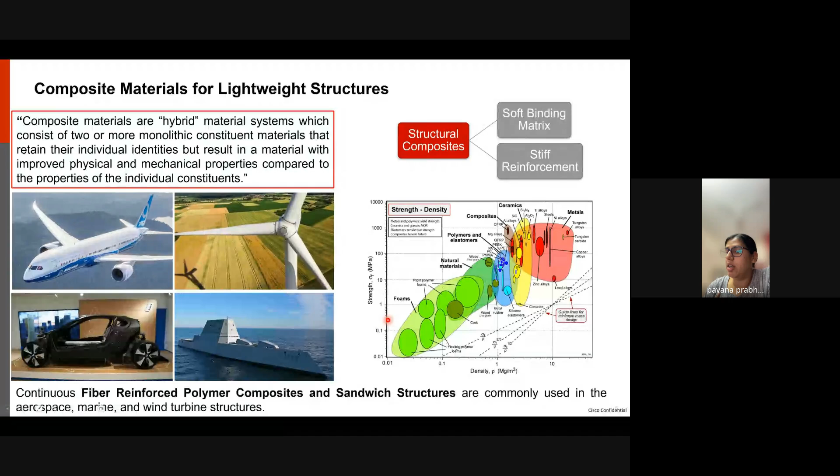Looking at this Ashby plot, which shows strength versus density, we can see that composites have strengths comparable to that of some common ceramics and metals, but their densities are orders of magnitude lower. That is a very attractive property of composite materials.

But these lightweight polymer composites are susceptible to damage and can fail catastrophically under in-service loading and other multiphysics environments. This could be dynamic impact loading, a lightning strike on a wind turbine blade, long-term exposure to moisture and low temperatures, or very high internal pressure such as in pressure vessels.

We focus on 2 main aspects of composites: damage tolerance and durability. Damage tolerance is the ability of the structure to sustain damage without catastrophic failure until a time such that the component can be replaced or repaired.

In other words, this is the load carrying capability of a structure once it has been damaged by service loads. On the other hand, durability is defined by a structure's resistance to long-term damaging effects, such as extreme temperature, UV radiation, moisture, other aggressive chemicals like salt, and stress cycles like in fatigue. Or in simple words, this is the life of a material: how long of an exposure can occur before a property dips under a certain limit.

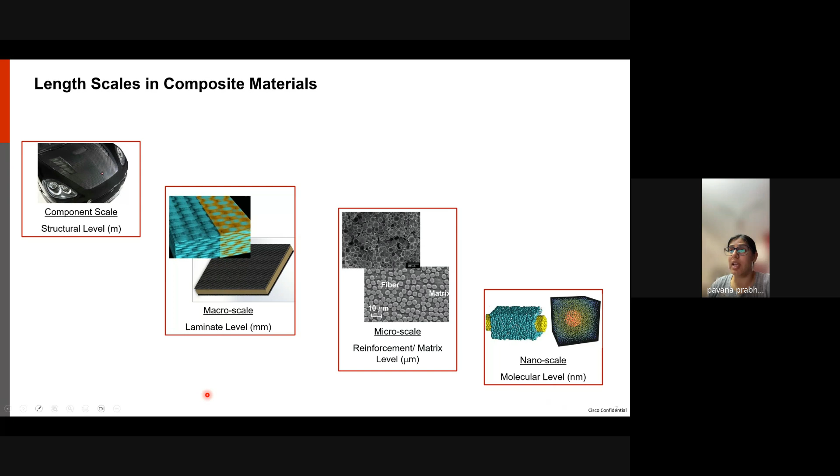So we focus on improving these 2 aspects in composite materials through architecting, which I'll talk about. But what makes it particularly challenging is the occurrence of complex failure and damage modes like delamination, intralaminar matrix cracking, fiber breakage, due to the presence of multiple base materials, multiple length scales, and how they interact with each other. But that also gives us the opportunity to tune or tailor the internal structure.

We focus primarily at the micro to millimeter scales. We're not looking at nano design of these materials. So there are two interconnected research themes in our lab in this direction.

We seek to establish process structure property relationships for manufacturing and designing, and study the damage and failure mechanics in multiphysics environments. Some of them we have looked at are listed here: extreme temperatures, dynamic impact, fatigue, moisture, and also a study we've done very fascinating on the microbial impact on their degradation.

We focus on this class of composites called architected composites, which exploit internal architecture such as hierarchical patterns and morphologies within composites, in addition to solid distribution and base material properties, to achieve some unique properties that are unattainable by traditional composites.

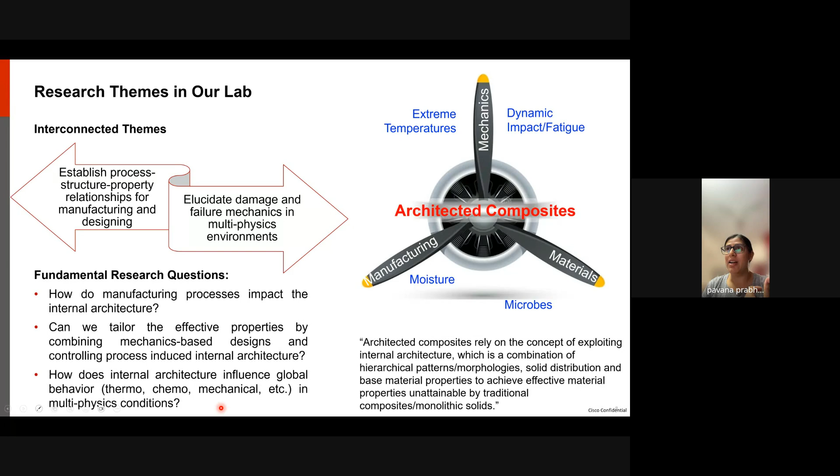A lot of this I'll talk about in today's presentation. And how does internal architecture influence global behavior, macro-scale response under thermochemical and mechanical loading, or in other words, multiphysics conditions? Although I will not focus on the multiphysics part in this presentation, we will focus on how these hierarchical designs manifest globally as macro-scale response.

So when I think about architecture, this is what comes to my mind: large structures, buildings, which have unique shapes and designs, and they're also aesthetically pleasing, but may or may not always serve functionality. And when we talk about architecture in composites, they occur at very small length scales.

At the micro to millimeter length scale, our lab has three distinct areas of research direction.

In continuous fiber reinforced laminated composites, we pioneered additively manufactured patterns at the interlaminar regions to enhance fracture properties. The second direction is sandwich composites, where we're additively manufacturing cores, designing them from micro to macro length scale for stiffer, lightweight behavior and achieving snapback behavior.

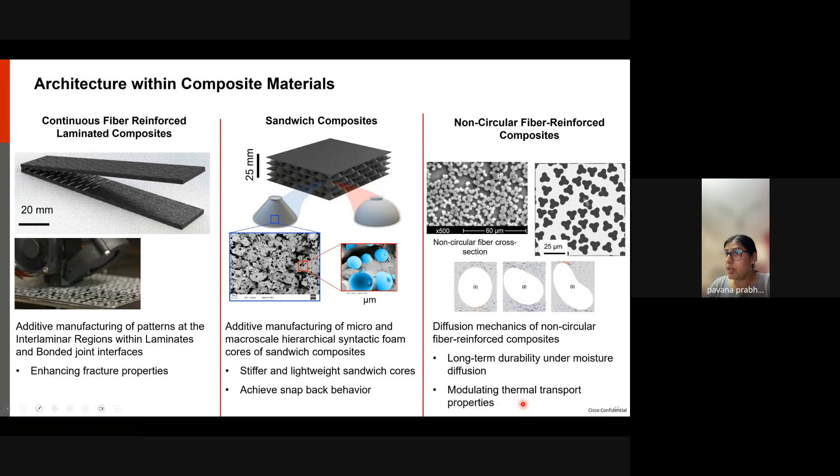The third direction looks at morphologies and patterns such as non-circular fibers within composites to achieve long-term durability under moisture diffusion, and also to modulate thermal transport properties. Today's talk will primarily focus on this particular topic.

Before I dive into that, I wanted to show what I meant by patterned interfaces using additive manufacturing. The objective is to improve the interlaminar fracture toughness and strength in stiff fiber reinforced polymer composites. The approach is to additively print patterns within traditional composites. We have 3D printing readily available, so we can impart any pattern we like at these interlaminar regions.

The other topic I talked about is composites in extreme environments like moisture and salinity. Due to melting of sea ice in the Arctic region in recent years, there's a lot of interest in how the polymer composites we currently work with will perform in these harsh environments.

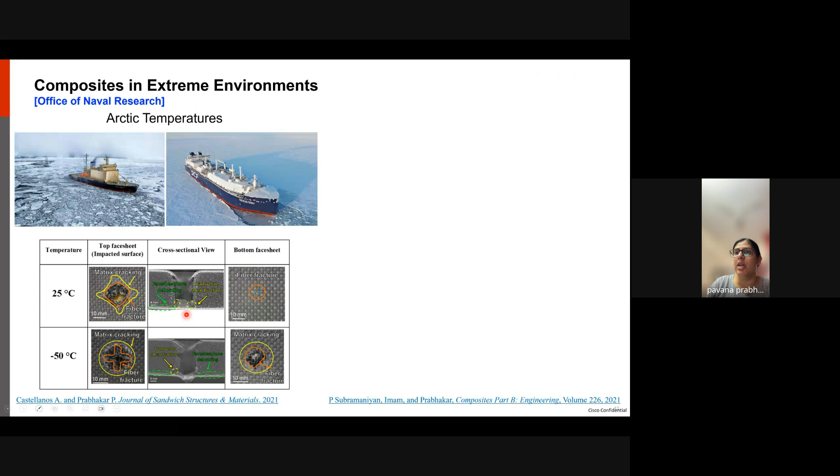Our work involved understanding how damage and failure mechanisms, primarily under impact, change under low temperature and saline environments. As you can see here, the failure mode changes from only core crushing and top face fracture to back face fracture as well, when we reduce the temperature from room temperature to -50 Celsius.

This is important to design future structures, but also to design relevant repair techniques for existing composites.

A more fundamental study focused on moisture diffusion, where we showed that non-circular fibers delay the diffusion of moisture through composites and result in reduced diffusivities. Again, more about these topics can be found in these two papers.

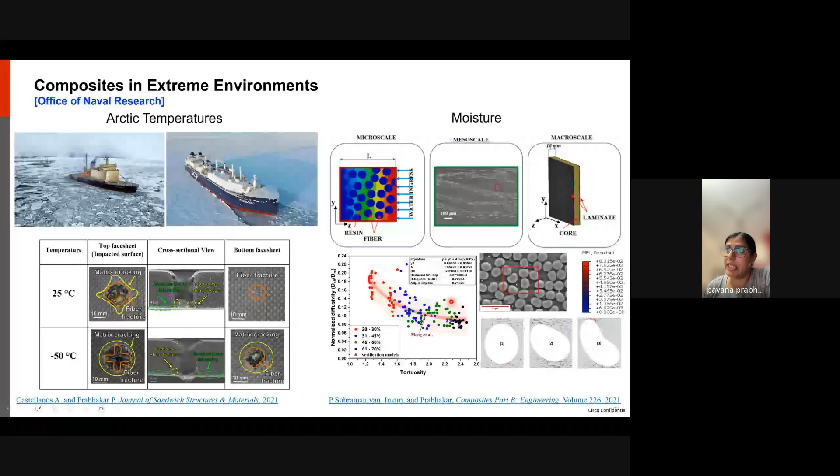The objective of this research was to design and fabricate structures that can dissipate energy and achieve shape recovery without permanent set. For example, here under impact loading with excessive deformation, there's a permanent set or damage.

We're primarily focusing on sandwich composites, which have a stiff face sheet, a lightweight core, and another stiff face sheet that sandwiches the core between them.

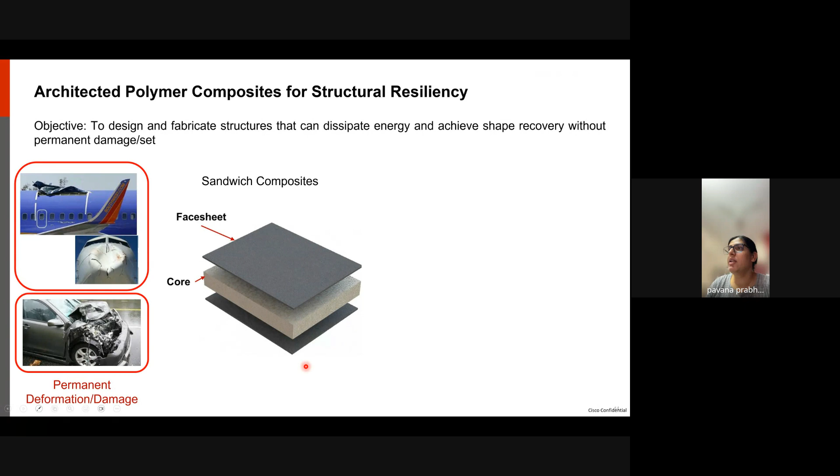This shows that these materials are currently excellent energy dissipators. They dissipate energy through core crushing, but they also suffer from permanent collapse or crushing.

So we wanted to see if there's a way we can design certain architectures in these foam cores that can achieve shape recovery after such excessive deformation, so that we do not need to replace the entire core, but just do a patchwork or so on the face sheet.

Here are our research questions. First, in the context of architected core at the millimeter length scale, can we achieve shape recovery without external stimulus after excessive deformation? We looked at concepts of negative stiffness and pseudo-bistability for that.

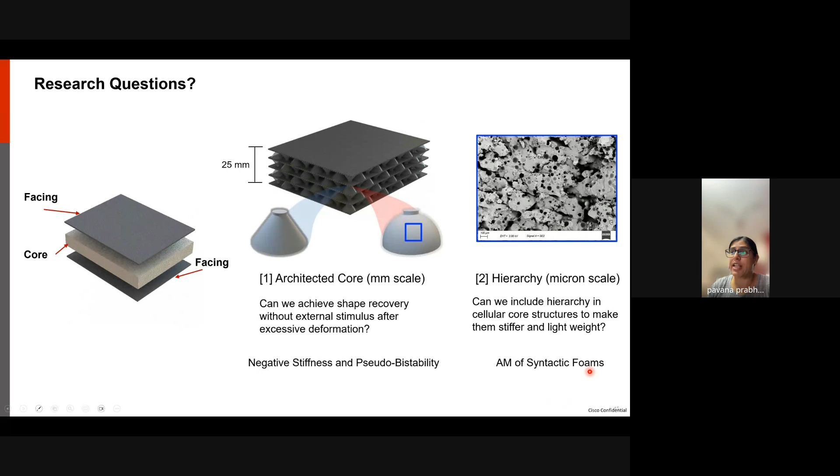Second, one length scale smaller, the walls of these architected cores can be manufactured with materials that introduce additional hierarchy into the foam core. So can we include hierarchy in cellular core structures to make them stiffer and lightweight? We looked into additive manufacturing of syntactic foams for this.

First, to design our core structures, we looked at negative stiffness and pseudo-bistability. Elastic instability can be classified into two categories: monostable and bistable.

In a monostable structure, as we start loading it, at some point it loses stability and snaps through to its second stable state, continuing in this stable state as we load the structure further. Now, at this stage, if we release the applied load, the structure snaps back to its original stable state.

In the case of a bistable structure, shown in red, after snapping into its second stable state, if we release the load, it settles in its second stable state—in simpler words, a deformed state. To bring it back to its original stable state, we need to apply more energy to the system. The displacements are shown here: it's stuck in its second stable state in the deformed state, but the monostable structure comes back to its original stable state.

Is my voice breaking? No, it's not. Okay. Other than the fact that my voice is broken, the internet is fine, right?

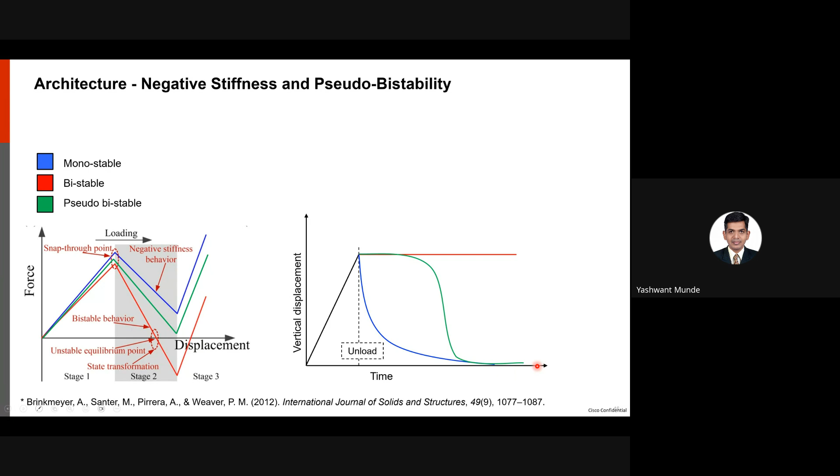So viscoelasticity that's inherent in materials aids this structural recovery. Can we exploit this property to allow recovery of the structure to its original stable state without external stimulus?

There is a work by Brinkmeyer et al. which showed snapback behavior using spherical caps made of PDMS, a highly viscoelastic material. As they load the dome, it deforms and at some point snaps to its second stable state. After a few seconds, upon unloading the load, the structure is still in its second stable state because it's a bistable structure. However, due to viscoelastic relaxation and recovery, the structure starts to move back and then suddenly pops up to its original undeformed state. This is shown by the vertical displacement versus time graph: after reaching the second stable state, the material relaxes, recovers, and then suddenly snaps back to its undeformed state.

This motivated us to try this for our hierarchical core design as well. So what architecture should we start from?

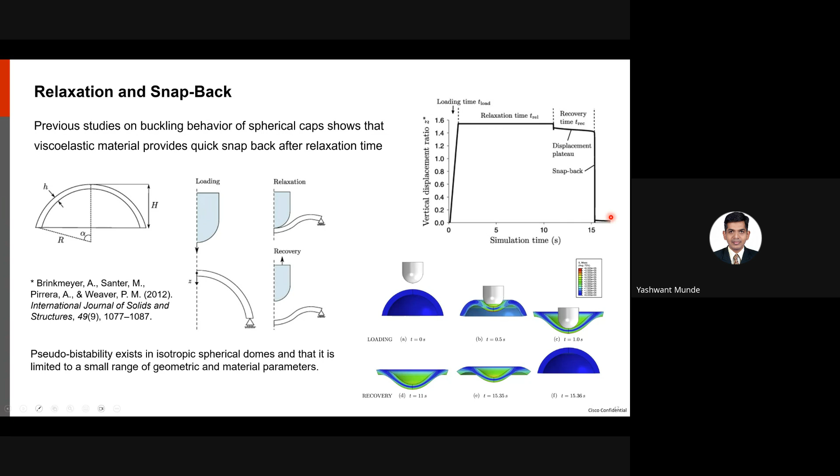That's the question. There's a lot of work out there on negative stiffness architectures—I'm only showing three of the most relevant ones, by no means a comprehensive account. This work by Lakes at UW-Madison showed that with arrays of struts arranged in this manner, there is layer-by-layer snap-through buckling from here to here to here, followed by full densification once all the layers have buckled.

A similar work by Bertoldi at Harvard showed that with inclined beams arrayed together, there is periodic snap-through buckling followed by densification, and all of these show negative stiffness zones. They also showed that compared to a vertical beam—which is monostable, deforming and returning to its original state after the load is removed—an inclined beam is bistable, meaning it buckles and settles in its second stable state.

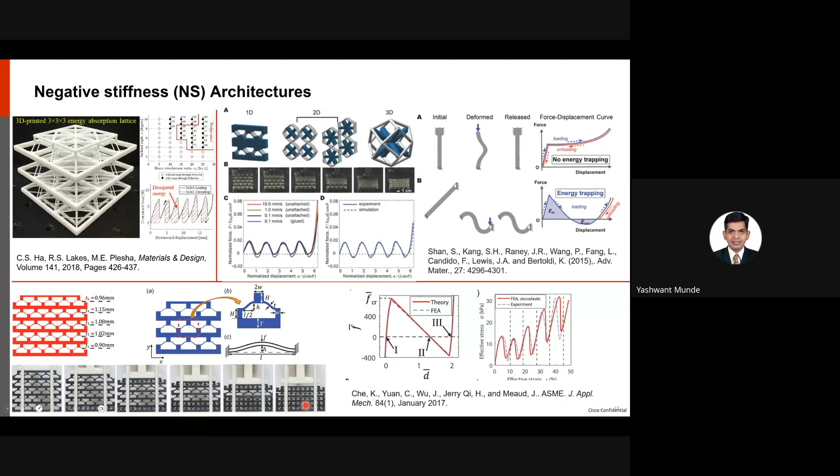Another work by Meaud at Georgia Tech, the most relevant for us, used sinusoidal inclined beams, again showing periodic snap-through buckling. They also showed that by heating it up, they were able to get the structure back to its original stable state.

With this in mind, we wanted to extend this design to a 3D structure, especially for foam cores. We started with a baseline sinusoidal shape, and using convolution in 2D, extended this to a 3D structure very similar to an egg crate that you might have seen. The unit cell is as shown here—quite complex to start with and parameterize.

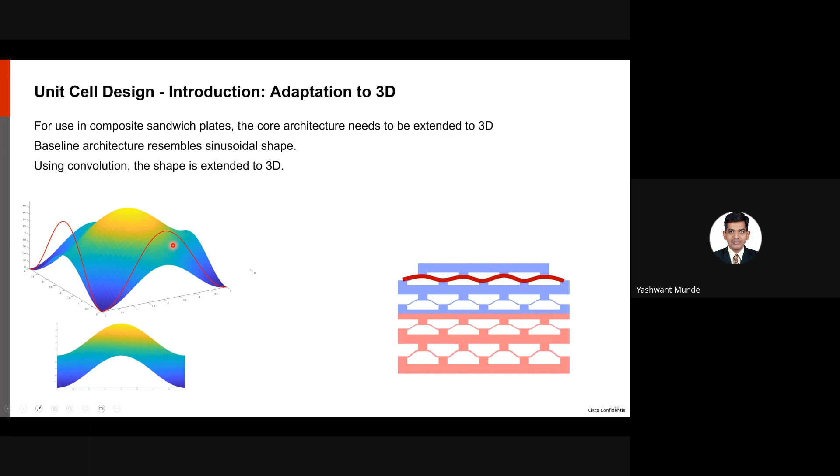So we looked at two extreme designs: a truncated cone and a dome structure. An initial study showed that, as expected, for the same wall thickness the cone has a higher initial slope in its low displacement response compared to the dome. Because we want adequate stiffness in our core structures—since we are looking at these as potential sandwich structures—we chose the truncated cone as our unit cell.

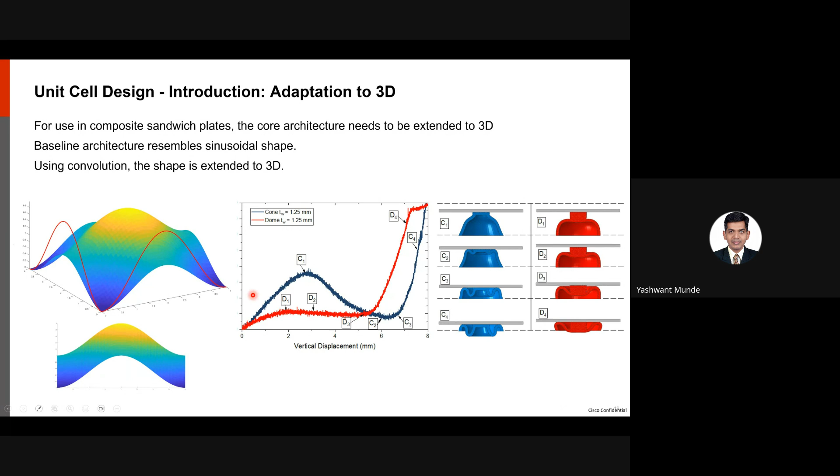We manufactured this using stereolithography, a 3D printing technique where we start with a resin and shine light layer by layer, as shown here, to create a 3D structure. We used a thermoplastic elastomer because we wanted sufficient viscoelasticity in the material.

So we created these truncated cone structures and arranged them as shown here. This is just one layer of these truncated cones sandwiched between stiff facings. We can create multiple layers by 3D printing them accordingly.

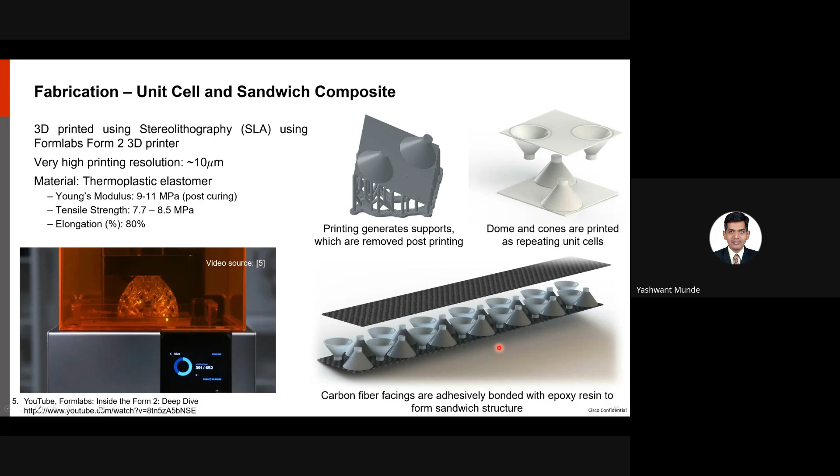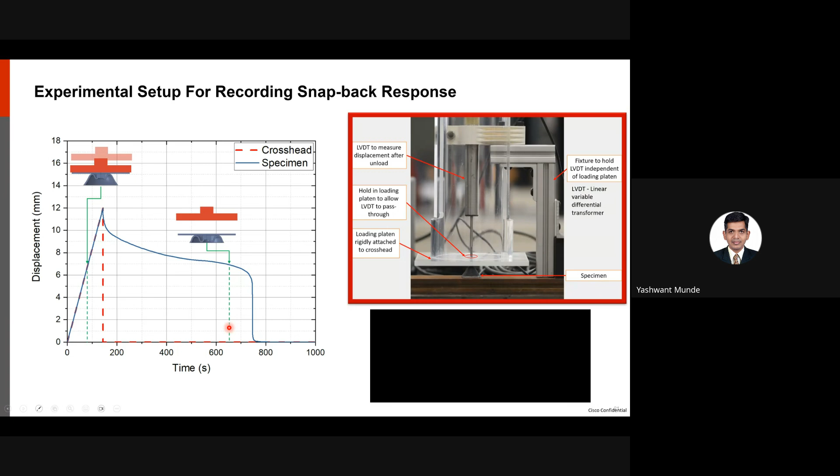We non-dimensionalized these geometric parameters into three: alpha, beta, and gamma. Alpha represents the thickness of the unit cell walls, T by L. Beta represents the slope that the walls make, H by RB minus RS. And gamma represents the curvature of these unit cells.

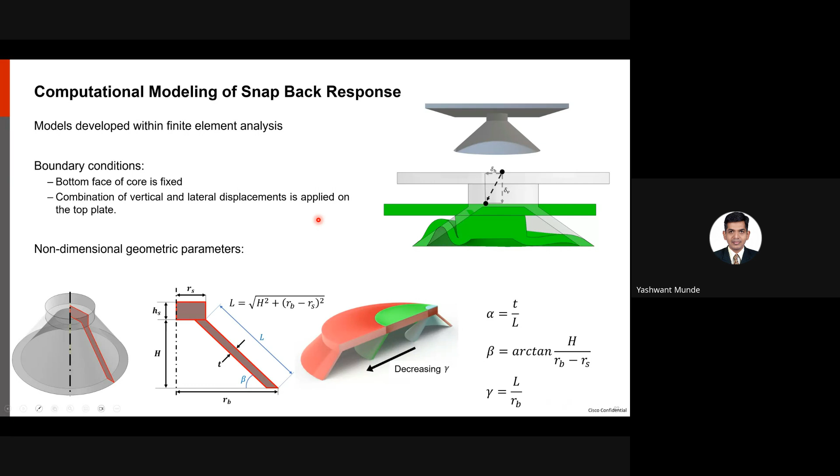So we modeled and simulated this in Abaqus. The inputs to this were the viscoelastic response of the material. We used a hyperelastic Mooney-Rivlin model with viscoelastic properties as a Prony series, as shown here. These inputs were obtained by performing relaxation tests—tension, hold the specimen, and allow it to relax—and we fitted that with the Prony series. Here's a response showing that these Prony series parameters do a good job of capturing that viscoelastic relaxation.

Using these parameters, here's an example of how the structure deforms when loading it, and then the material has some relaxation, followed by—as you can see—it immediately snaps back at that stage. So this is the response we are expecting when we have a good combination of geometric parameters and viscoelastic properties.

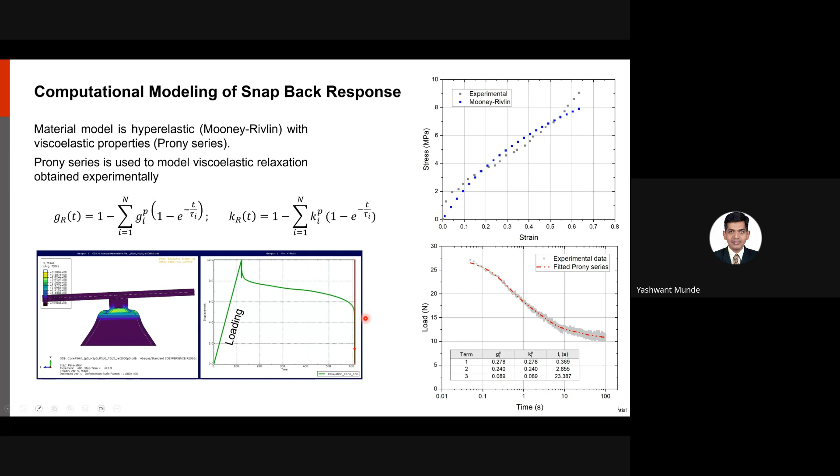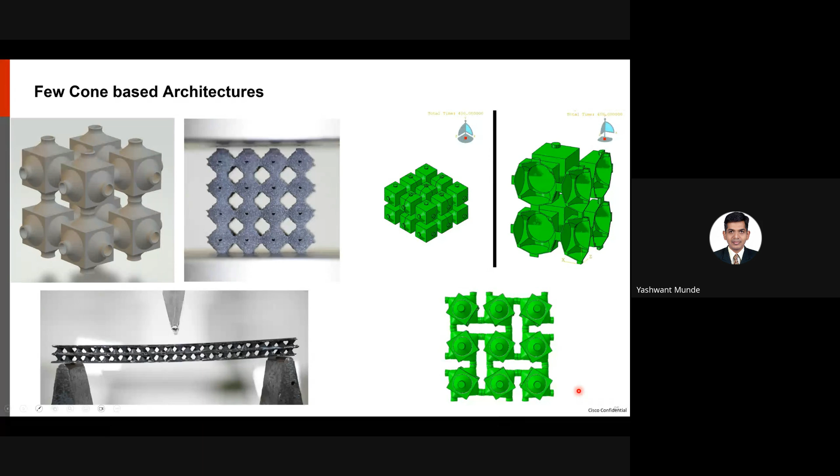We can also use this for reconfigurable structures. As you can see here, they can be compressed into a compact structure and released where needed.

So this comes to the end of the first part of this talk. That is, we proposed an alternate sandwich core design using viscoelastic architected structures. The viscoelastic relaxation of the material introduces an intermediate state of stability between monostable and bistable in the form of a time-delayed recovery, otherwise known as pseudo-bistability. Due to this pseudo-bistability, structures are designed to buckle and collapse to dissipate energy and recover on their own after a certain period of time, exhibiting structural resilience.

Design maps constructed by computational modeling showed that a small range of geometrical parameters result in bistable or pseudo-bistable behavior, and imperfection reduces it further. Some future work is to explore other design possibilities for sandwich cores, and also how to make these stiffer and lightweight. As you saw, these structures were quite flexible, so not ideal as a core for a sandwich structure. So how can we make them stiffer while keeping them lightweight?

That creates a nice segue for the second part of my presentation, which is on additive manufacturing of syntactic foam composites.

I can pause for a second if you have any questions, or we can keep it for the end, however you'd like. Should I continue? Yeah, please. Yes. Okay, sure.

Now, the objective here is to enable additive manufacturing or 3D printing of architected syntactic foams for these sandwich cores. Here's the idea. We touched upon this part, which is architecting at the millimeter length scales. Now we want to introduce an additional level of hierarchy by creating segregated matrix regions in these walls of the unit cells with embedded particles within them.

The material, in this case a thermoplastic polyurethane, TPU, inherently is a composite at the nanoscale, where they have hard domains which are arranged into hard structures as shown here, which are hydrogen bonded, and surrounded by more flexible chains of polyols as shown here. Now in our work, as I said earlier, we are not manipulating these aspects. We are fixing the hard domains in our structure, in our material, but more so tailoring the internal architecture at the micron length scale.

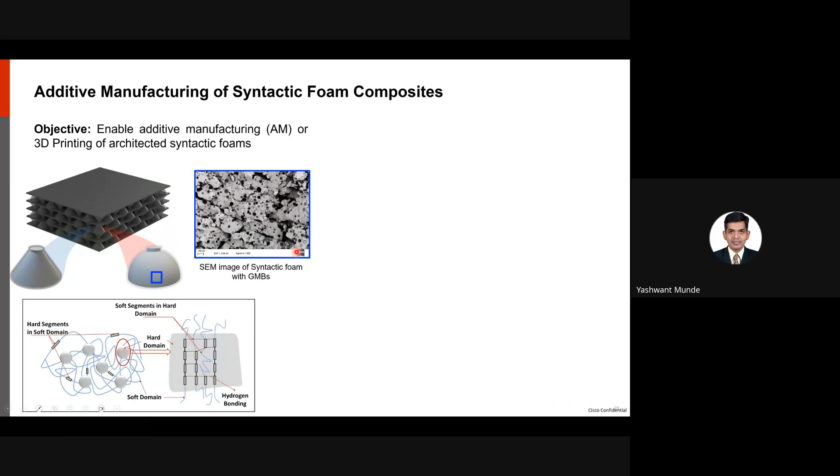So in this work, we are printing these cell walls with polymeric syntactic foams. We chose selective laser sintering to manufacture these hierarchical syntactic foams. I'll tell you in a bit why.

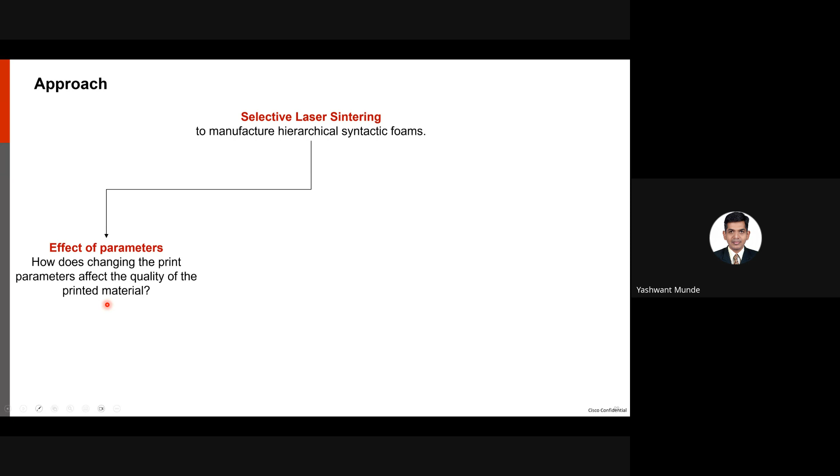So we're looking at the effect of parameters. That is, how does changing the print parameters affect the quality of the printed material? Second, how does changing the volume fraction and the size of microballoons influence the morphology and the mechanical performance of the foam? And last, how do printing these hierarchical foams with architectures - what are some differences between the architected foams printed with pure elastomer compared to those with the microballoons embedded in the cell walls? So in the next few minutes, I will try to answer these three questions for additive manufacturing of syntactic foams.

We go from 60 micrometer mean particle size to 22 to 15. The syntactic foam that we print uses this nomenclature: SF stands for syntactic foam. The first number is the particle size, that's 60, 22, or 15. Dash VF is the volume fraction of these particles we're adding to the TPU powder.

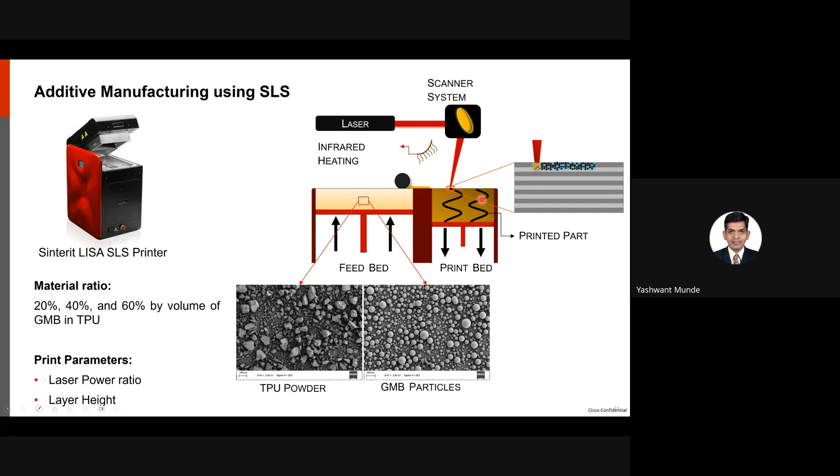Okay, so we started with just pure TPU first and tried to understand the effect of these print parameters. Here we looked at something called LPR, the laser power ratio. 1 implies a laser power of 3 watts, and 1.5 and 2 are just multiples of that value.

This is the limit of the SLS printer we used, but it was to our advantage because it gave us some unique internal architectures, such as segregated regions when we used these low laser power ratios. Our default layer height is 0.12 millimeter, and we could go to 0.075 millimeter and 0.15 millimeter as the two layer heights.

So first we looked at the tensile performance. As we increased the laser power, we saw that the strength and modulus increased. And with increase in laser power, and decrease in layer height as well, we saw that the tensile properties increased.

For example, the star here is laser power ratio of 1.5, but with reduced layer height. So we see there is a slight increase in properties when we reduce the layer height as well. So we chose 1.5 and 0.075 as our parameters to print the consequent structures.

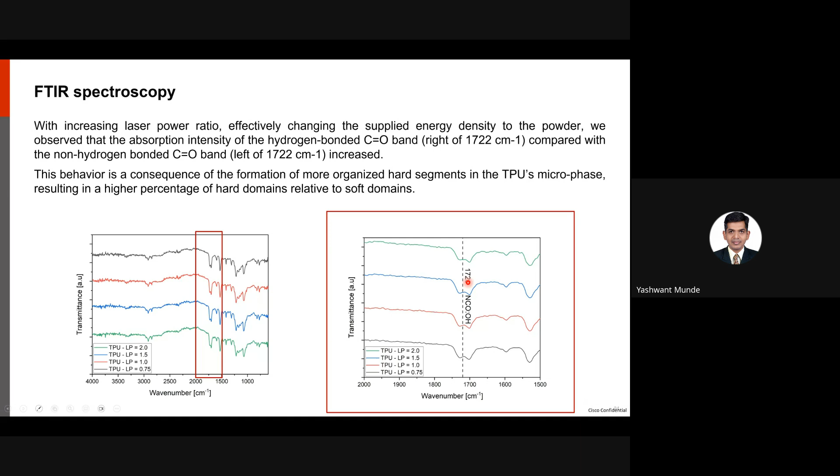So we showed this for the first time, that GMB particles dictate the cell wall size, and this is attributed to higher scatter of the supplied laser energy due to higher particle density per area in the powder blends, with the highest scatter occurring in the smallest GMB particle case.

So we wanted to see how these manifest as mechanical properties, first in tension. As expected, as we increase the volume fraction for a fixed particle size, the strength dropped and the moduli stayed in the same region as shown here.

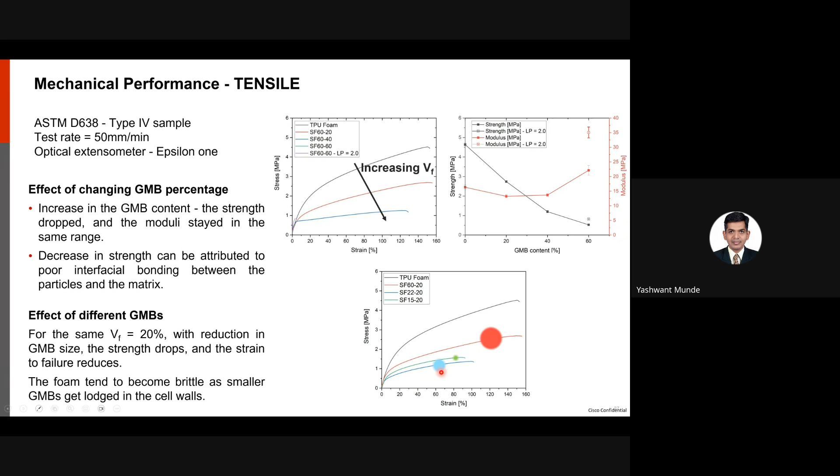But our main focus was in compression because of these high pressure conditions in underwater vehicles and things like that. So we wanted to understand what is the performance under compression.

This can be attributed to lower crushing strength of the GMB particles. As you may recall, the larger particles have the lowest crushing strength, and they also create bridges between the cell walls, causing their compression and collapse, resulting in this reduction of the plateau region.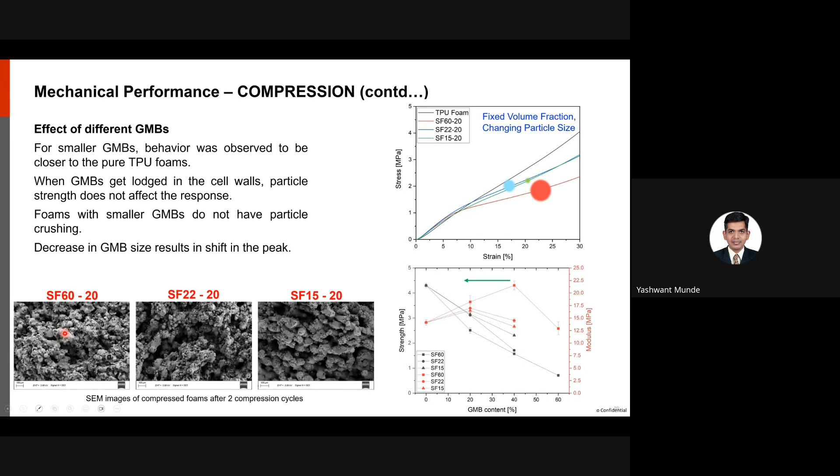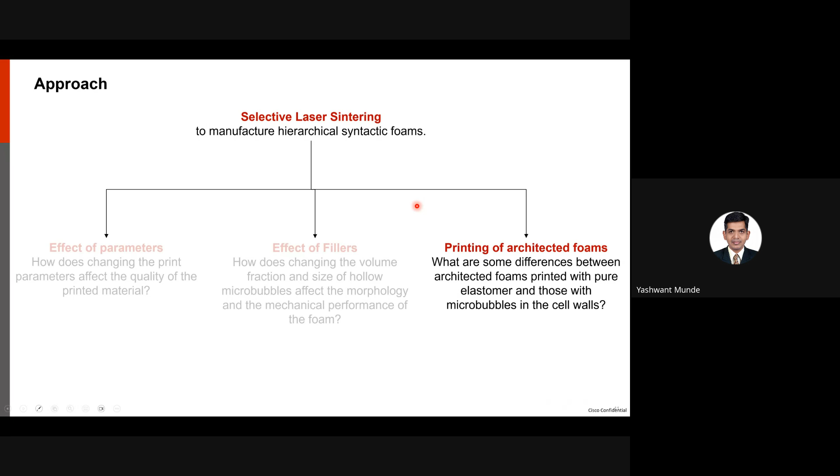So the last topic is how this difference in stiffness and densification manifests in the architected cores. Here we consider two types of architected foams.

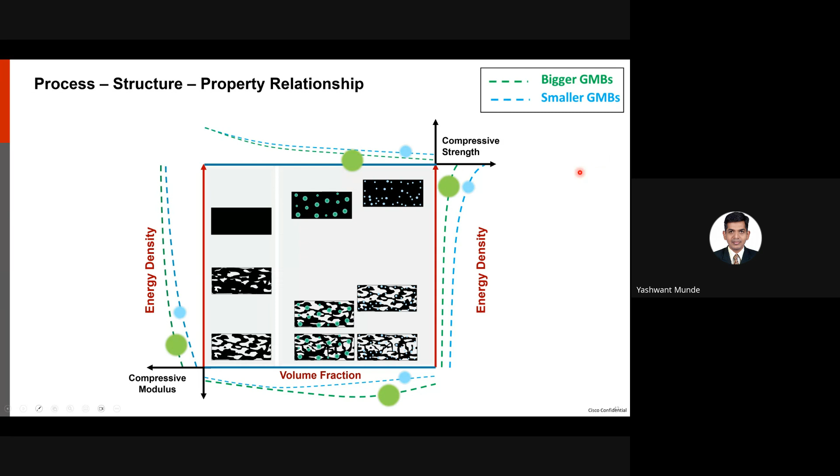In terms of compressive strength, we see that as the energy density increases, the compressive strength increases because of better contact and confinement of the particles, and the smaller particles show a higher improvement in compressive strength. In both cases, the strength decreases with increase in volume fraction, so we want to limit that to a smaller volume fraction.

Here we see some polyurethane rigid foams, PVC cross-linked foams, and our foams at this stage. There are also some epoxy-based, very stiff foams, so we will not compare them here. Right now we have the strength slightly lower, but in a reasonable density range.

But with architecting, and by increasing the inherent hard to soft segment ratio, which we did not change in this case, we can push this up in terms of modulus. Then architecting them, which would create some hollow regions, would reduce this density but also reduce the compressive modulus a little bit. So this is what we are striving for going forward—manipulating the hard to soft segment ratio in the viscoelastic material we are looking at, and further architecting.

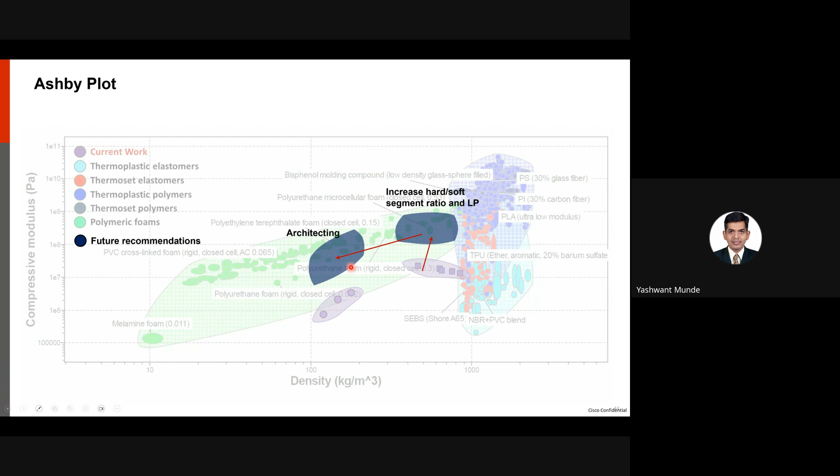So in summary, we shed light on the mechanics of additively manufactured syntactic foams with segregated matrix. We showed how AM parameters can be coupled with GMB parameters to achieve desired mechanical response, or tune the mechanical response with such segregated matrix.

We demonstrated for the first time that when we have such segregated regions, the microballoon size dictates the cell wall thickness, and also decides whether we have a stiffer response or a high densification stress in these syntactic foams. The influence of microarchitecture on the macro-architected syntactic foam, that is, how embedding these micro scale particles manifest differently when we choose stretching dominated versus bending dominated architectures under compression.

Some ongoing and future work: we are looking at the impact response of these architected polymer composites. We've done a fair bit of work in the thermal, dielectric, and viscoelastic response measurement of these syntactic foams. There's a published paper and an arXiv paper if you're interested to read further, primarily in view of marine and oil and gas industries, where we can use these perhaps for underwater cables and pipelines due to their excellent insulation properties.

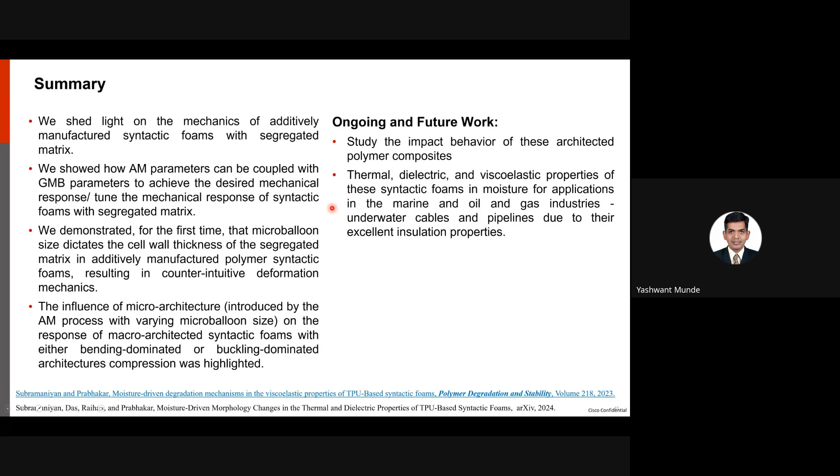Some potential applications of these flexible syntactic foams: when we're looking at morphing wings or blades, these provide a very good lightweight alternative to tune how the blades and wings can be made flexible, extending the chord or changing the shape of these wings and blades in either an active or a passive way, because they require very little or no energy to switch between different modes during shape change.

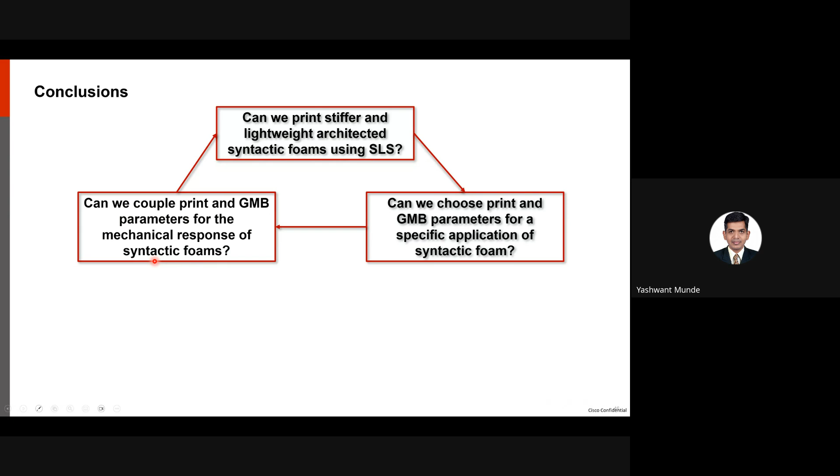So with that, I'd like to conclude saying: Can we print stiffer and lightweight architected syntactic foams using SLS? Yes. Can we choose print and GMB parameters for a specific application? Yes. And can we couple print and GMB parameters to tune the mechanical response of syntactic foams? Yes. So we have answered all three questions in this work. So with that, thank you all for listening.

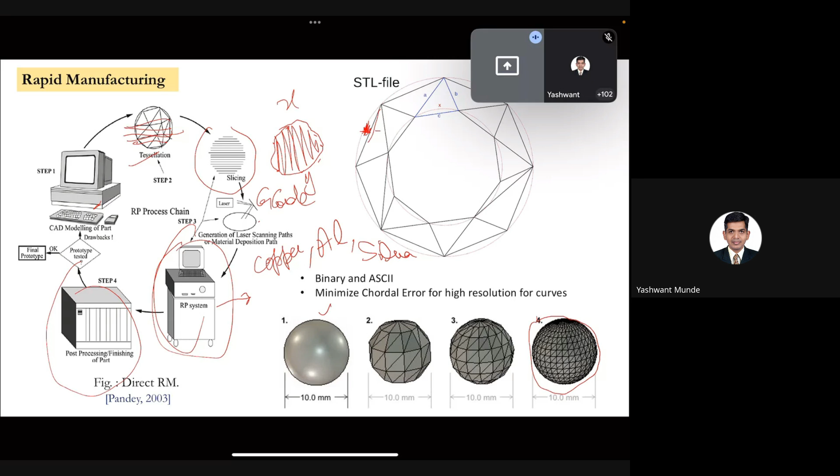But as I gave the example, you have to make something like copper, which is very difficult to fabricate by this process. For example, aluminium is very difficult to fabricate, and you have to fabricate silver. It's not possible to make silver products using this RP or any traditional RP system method.

So you have to go through different indirect methods. I can give you a couple of examples of indirect methods. Like already we are using an indirect method in investment casting. What we do for casting, we need a pattern, and that pattern is fabricated by a polymer 3D printer.

So you have a polymer 3D printed part. It can be FDM, SLS, SLA, or any type of process. Later you use it to make a mold. You fill it with investment material, then remove it. You get some space, and you pour some melted liquid to get the final shape.

That is the traditional process of investment casting. This also comes under indirect rapid manufacturing. You've made the final part, but it is not directly 3D printed - it's indirect. You use 3D printing as a component, and you use another process like casting to make the final metal product.

You can use aluminum casting, steel casting, any type of material available for casting can be used in this process. But there are many limitations - when you're casting, you don't have good mechanical properties, you have to do thermal treatments. So that is also a problem in this process, but it is handy to make any shape.

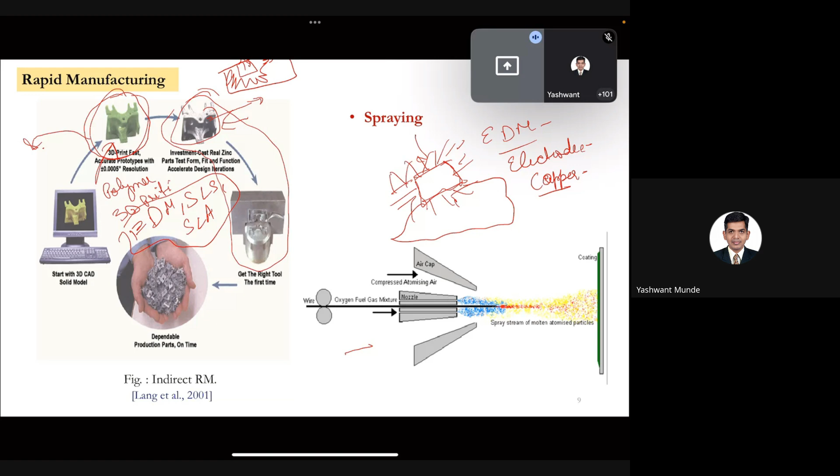So another process is electroforming, and another process is investment casting, which I shared earlier.

Another process is sintering. Instead of using casting, if you use sintering, it always has an advantage as compared to casting. It does not have residual stresses, and it has good mechanical properties as compared to casting components.

In sintering, you don't need melted liquid. You just have to go up to 60 to 80% of the melting point, you don't have to go large. Like if you have to sinter a ceramic which has a 3000 degree Celsius melting point, you can easily sinter it at around 1800 to 1900 degrees Celsius. That is the advantage of sintering.

So we will see how we can use a polymer 3D printed part combined with sintering to make metal parts.

Now you don't have a laser, there is no laser, there is no electron beam source. So joining of the metals is by conventional induction heating, or whatever the heating source is in the furnace. It can be a microwave furnace also, but you don't have a laser, which tends to reflect when it falls on a highly thermal conductive material like copper. So by combining the polymer 3D printed part and sintering, we can easily make copper 3D printed parts.

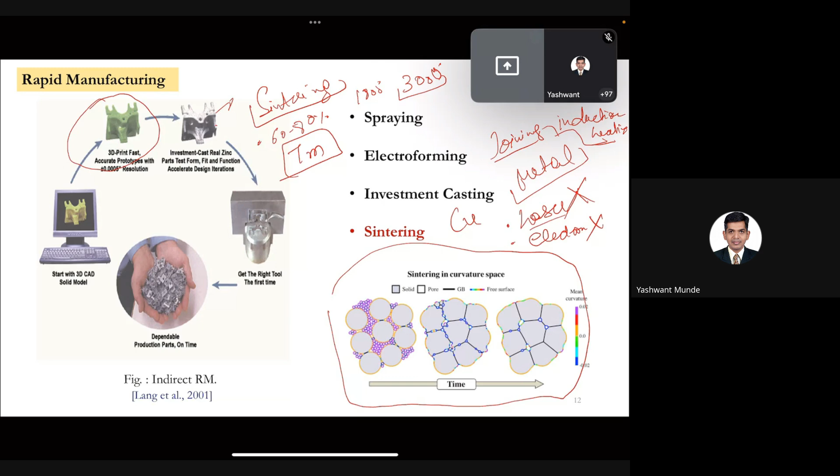Let me show you some. So to understand sintering, we need to understand the mechanism first, how sintering works.

Sintering generally works when you have metal particles that are very close together, not joined, but packed at the boundaries. When you heat up to near 60 to 80% of their melting point, the atoms in the metal particles get activated, and they want to lose energy, so they start making a neck among the nearby particles. There could be small dislocations which give a chance for releasing energy and transferring atoms, making very small joints that turn into small necks, and these necks grow and form a full component.

This is called the first stage of sintering, this is the second stage, and finally when there are very small round pores, that is the third stage of sintering. So in sintering, it's very difficult to get a 100% dense part. You can go maximum up to 99.99%.

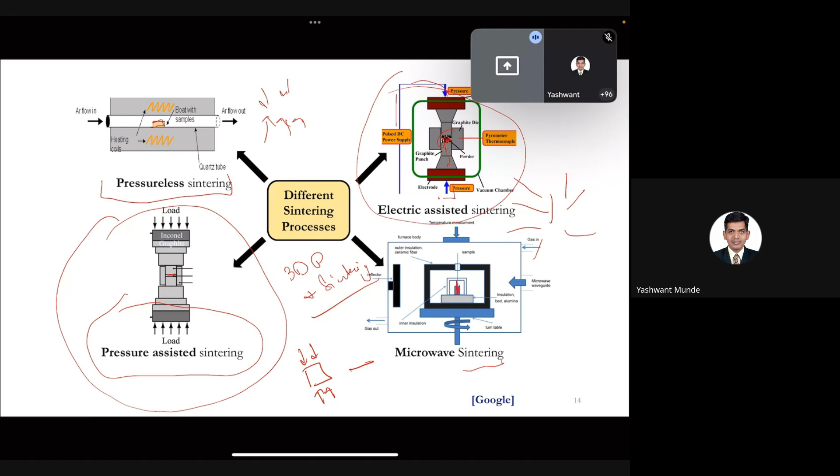When you are having a complex shape, like a porous structure that is hollow from inside, you can't put load on it, otherwise it will destroy the sample. So pressureless sintering, or microwave pressureless sintering, where there is no pressure on the sample, is the best suitable process to use with 3D printing.

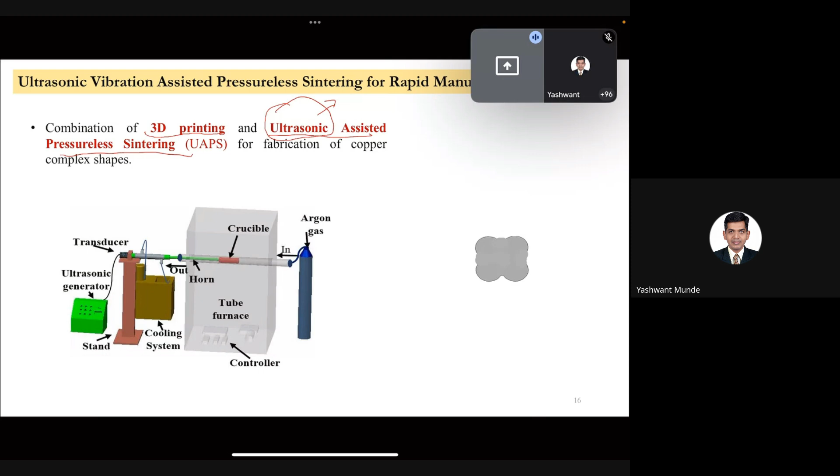So we have developed a new and unique process, very cost effective. Just within 2-3 lakhs you can make this setup. This process combines 3D printing with ultrasonic assisted pressureless sintering. Now there's a new word here, ultrasonic. I will explain why we need ultrasonic, and once you relate it with the mechanism of sintering, you will understand the requirement.

So the process works like this. First you need a CAD model. You can come up with any shape. This is a very complex foam structure with varying graded strut size, like 1.2mm to 1mm or 0.8mm at the end. So it's a graded structure, and you can make any CAD model.

After the CAD model, we will print it with any polymer 3D printing machine. It can be FDM or SLA. In this case, I have used SLA because it gives me a very fine surface finish. That's why I'm using SLA here.

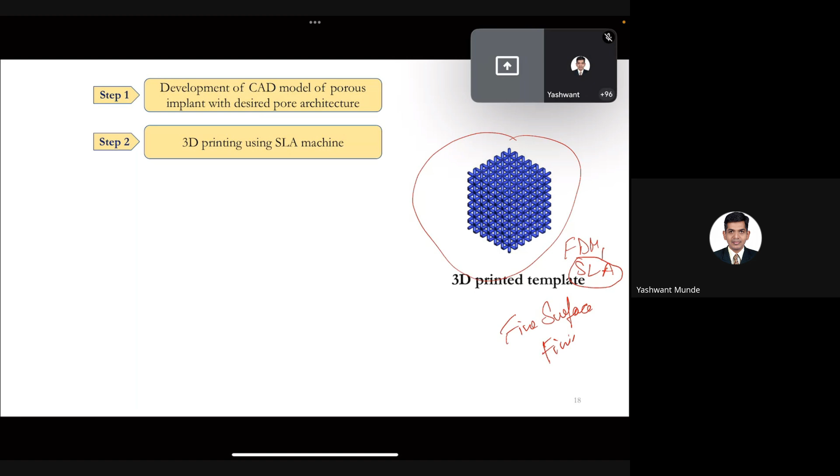Then the third step is to make a mold. You take your 3D printed sample, put it in a crucible, and add investment powder. You can use POP with water, or any dental wax investment powder, mixed with some solvent. When you mix it, it hardens and you get a very hard structure. Now in the pores, you have investment powder.

The fourth step is I put this whole crucible in a simple open furnace, which costs around 40,000. I heat it up, and what happens is your polymer, which is blue color, burns out and you get empty spaces. Now this empty space, I will fill with copper powder.

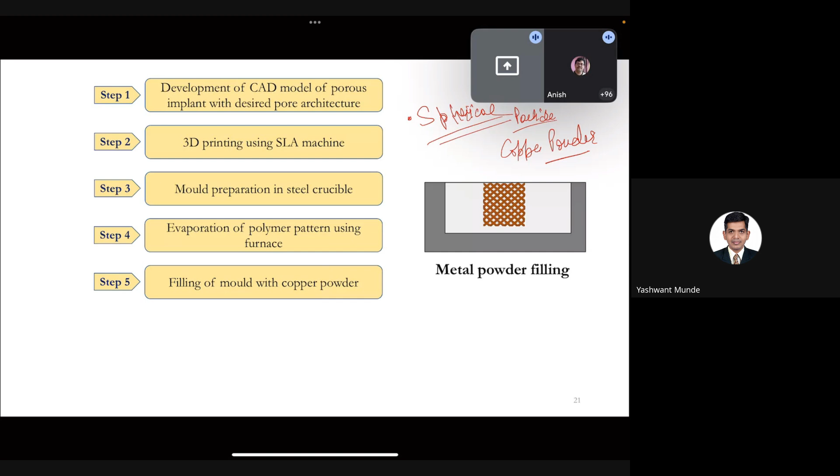Now here's a condition: your copper powder should be spherical in nature. If anyone wants to answer why we need spherical particles, I would be really happy to hear that. Why can't we have an irregular shape for sintering? Anyone want to answer this? Dear participants, anyone can answer - why is spherical particles required for sintering?

It's required for good densification. You can relate it with surface energy also - you're having a better surface area and a better connection. You can have better channels to transfer energy from one atom to another. That's why we need spherical powder. I am filling it here because I can't put a load, so I don't have space to put load. These are free particles, so I need a free, spherical particle.

So now if I sinter a spherical particle, at the end it will give me a pore in the center. But then my sample will only be 70% sintered. I need my density around 99%. To get 99%, I need to put load here, so that they can squeeze together during sintering.

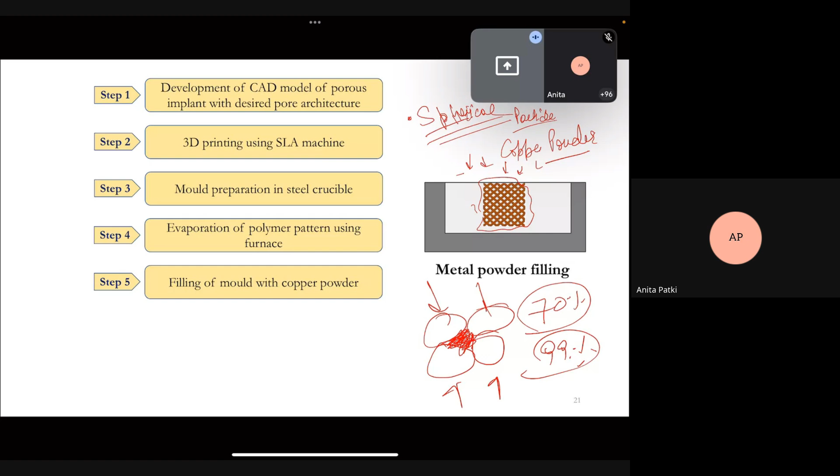So it means my sample can't extend further - I can't extend my sintering process. It has already reached nearby 99%, or 98.5% which I get here. So I need some external energy which I can give to the sintering particles at high temperature, so they can bond together better, and diffusion could be better. I can't put a load, but I can give another external energy.

So in this case, we have given ultrasonic vibrations. We tried to give vibration to this crucible so that vibration can reach my particles and they can bombard with each other.

They can bombard with each other and create local energy, local temperature at very local joint points, and this can increase the densification.

So we have designed this whole setup, which was only around 1.5 lakhs. It's a simple setup, not a complex one.

It has just an ultrasonic generator and an ultrasonic horn, the big horn. That was a new thing we did. We designed a new ultrasonic horn which we take up to 1000 degrees Celsius, attached to this crucible when placed in the furnace.

So this is the whole process, starting from the CAD model, and at the end, when you sinter it with ultrasonic assistance, you get a dense structure having the same shape as the CAD model. These are some examples, very complex shapes and forms we did, giving very pure copper, around 99.9% pure, which is very difficult to get with a laser-based system.

So you can use it even for gold. Gold is also very difficult to make by a laser-based system.

So the major designing component is the ultrasonic horn. I will not go in detail, those who know about modal analysis can easily pick it up. Generally when designing an ultrasonic horn for ultrasonic machining, we use a one nodal method, having one node and two anti-nodes.

This is generally for the step horn, around 128 point something mm in length by analytical calculation. But in this case, we need a very large horn, so we combine these small horns into having 6 nodal points.

And having a number of anti-node points, so that when we start giving vibration at a certain amplitude, it should amplify at the middle, and the same amplification should continue to the end. So this is our manufactured horn, which we verified with the vibrometer to check the vibration.

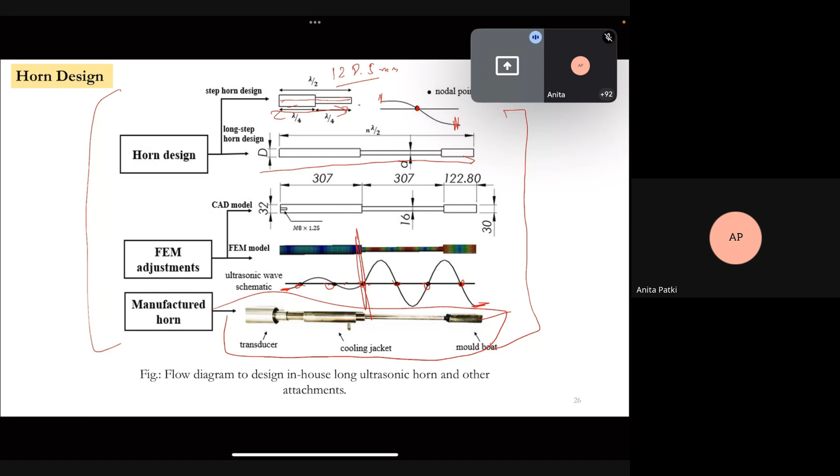Is it giving the same natural frequency, or the same amplitude value? We required around 20 micron meter displacement in the longitudinal direction.

So we have to do FEM modeling, regarding modal analysis, and check how much vibration is passing in the longitudinal direction.

So what is the physics behind it? That is important to understand. When I'm having spherical particles and I give vibration, I have to move it in a particular direction. What will happen? There will be rarefaction and compression among the particles.

So we have chosen random shapes and random sizes of particles. The shape was spherical, but they were random sizes.

What was happening when we gave vibration at room temperature without putting any pressure? All these small particles tried to settle in the voids of larger particles. By this, we have already increased the connection.

This connection is generally achieved in the conventional process by pressing them to make a compact, but here we can't put pressure. So we did it by ultrasonic vibration so that we can increase their connection.

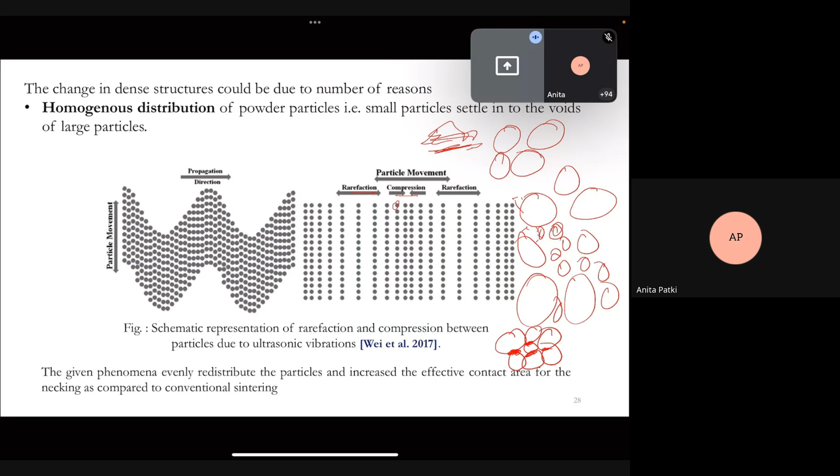Second, as I mentioned, when we give vibration there should be local heating between the particles. We tested this and found around a 30 degrees Celsius increase in room temperature, from around 30 degrees Celsius going up to 60 degrees Celsius when putting vibration to these particles. And as we use it along with sintering, the gap will be higher.

Basically the densification at 950 degrees Celsius for the copper is around 99% as per the conventional sintering, but at 850 degrees Celsius we got around 98%.

The reason for getting this at low temperature is you are having local heating among the particles. This is generally called flash heating. We verified it with the mathematical model also.

What is happening when you are having a flash heat? The particles, when they are bombarding, are trying to create dislocations, which we see by TEM also. There are very small dislocations. Dislocations are defects, so it can be any screw dislocation or edge dislocation.

Through this dislocation, when you have a chance of activating the atoms, the atoms release their energy to make bonds with other free atoms, in terms of defect dislocation. By having flash heating, you get more dislocations and better densification. Your material flow stress decreases when you are flowing the material from one particle to other particles. That is the physics and fundamental behind this process.

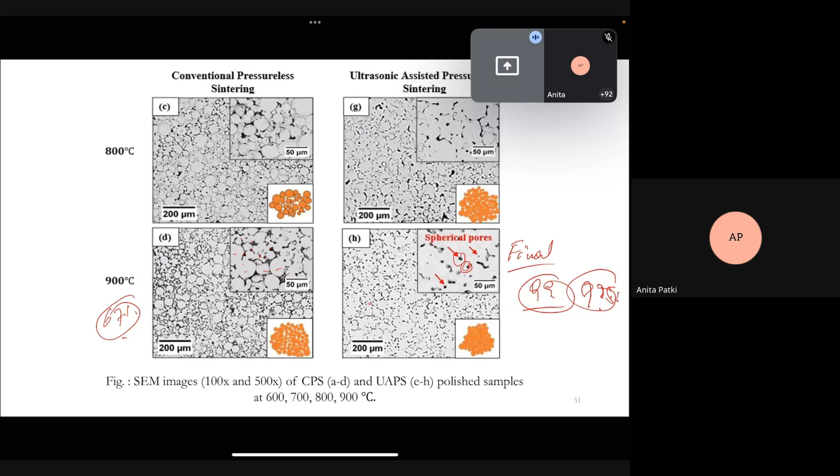After developing this process, there are many concerns, like can we make it better? In the previous slide we added ultrasonic vibration. There are other factors in sintering like sintering temperature, heating rate, soaking time. A number of things could be optimized to get better densified parameters.

But in 3D printing, when you are comparing with the CAD model, our major requirement is always the shape. We should get the same shape as our CAD model.

For this, we need to optimize the shrinkage, whatever shrinkage occurs in the X direction, Y direction, Z direction. We need to avoid the shrinkage and have a minimum shrinkage so that we should stay close to the CAD model always.

We can do some compensation. So we approached response surface methodology, found out some results, and developed a mathematical model.

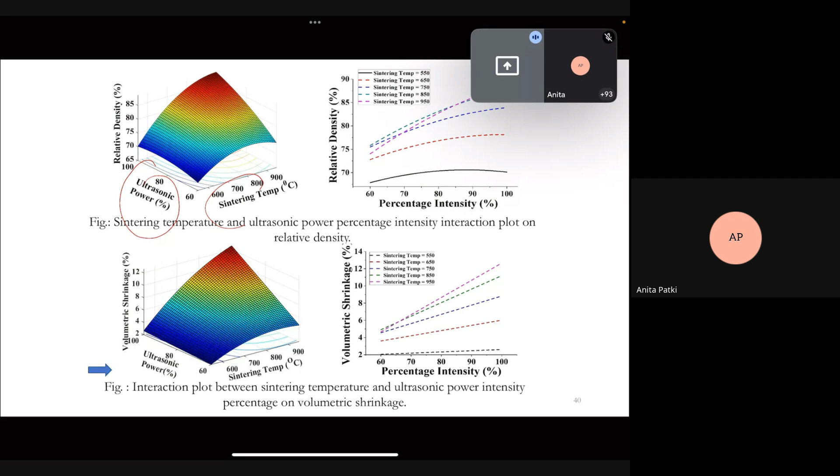This is a statistical model based on response surface methodology, and we found vibration was a major factor increasing the density, but sintering temperature was also a major factor. These two factors could combine for better densification, which we found in the interactions also. Ultrasonic power and sintering temperature, when combined, always give high density.

These are a few results. Without vibration, with low temperature, you will find a lot of gaps. But as the temperature increases and the vibration increases, you get very closely densified structures, which give you better mechanical, electrical, and thermal conductive properties.

We have tried some case studies with this. We have fabricated heat sinks. In heat sinks, during use for heat transfer, you always need a good surface area so that heat can easily transfer between the two.

So here we have chosen a lattice structure which also has good surface area, and in these struts we have kept the temperature down. You will see there is some porosity, which was intentionally kept so it can also have heat transfer through this lattice structure, through these struts. So you can have a double effect: a micro effect and a macro effect. Both effects could be covered.

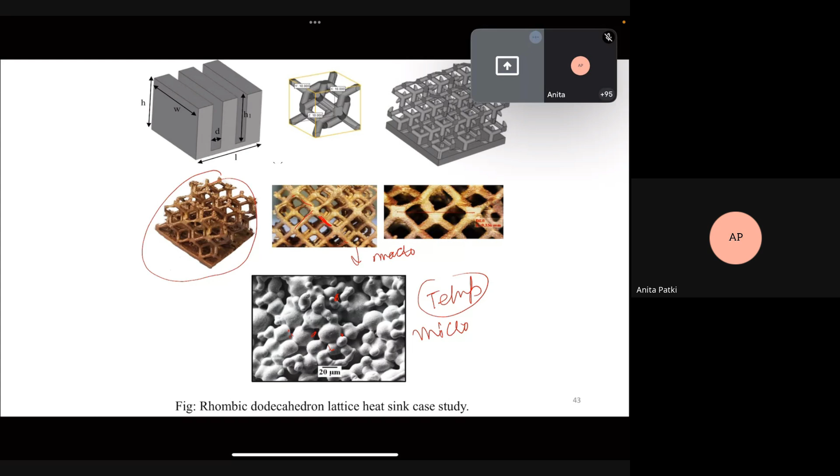These are a few other examples, to test the efficacy - can you make any complex shapes? These are some complex shapes we have made by this process, having the lattice structures.

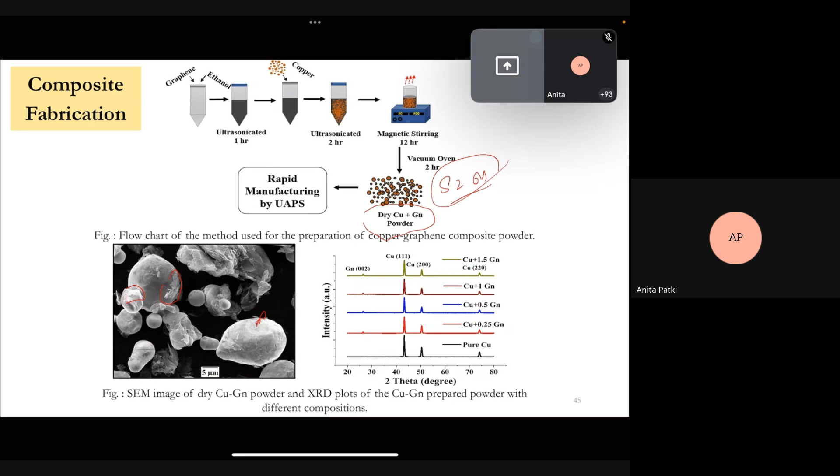So you can't mix them properly for SLM. But here, the vibration is at micron level—you have a micron-length graphene with nano thickness, so you can mix them properly so that it can adhere. Graphene sits on the spherical particles, they mix properly, it adheres to the spherical shape, and you get a proper mixture of copper and graphene. I will show you some pictures.

This is what we have mixed, you can see this picture. This is without ultrasonic vibration—we have not given vibration, and you can see graphene forming a bunch, a bunch of graphene which is not a homogeneous mix. But when you apply vibration, it is properly packed between these spherical particles, giving you better properties.

Like better electrical properties—we have tested it for some tribological applications on a pin-on-disk setup, and the ultrasonic-assisted pressureless sintering always gives better results compared to the conventional process.

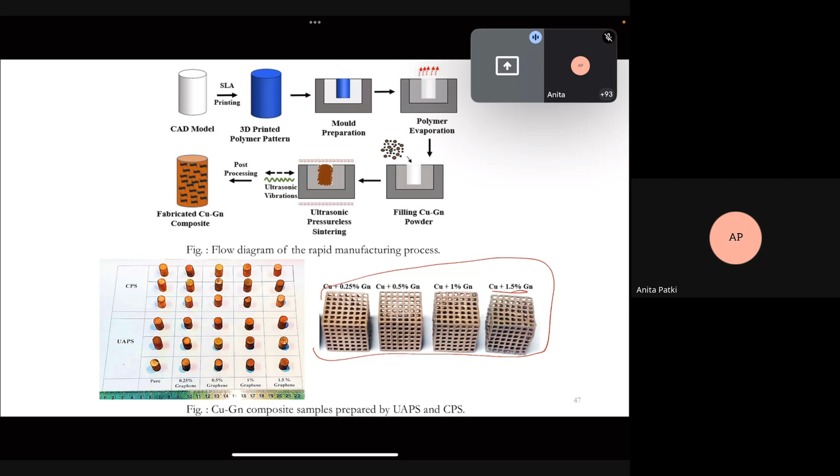We have also tried to make other forms, like copper-graphene foams, and tested their mechanical properties, heat transfer, and electrical conductivity. It can be useful, and we are even trying to do it for silver, where it can be used for some nuclear applications.

So these are the examples I have shown you—you are having a very uniform packing of graphene in the copper, and you can make any type of copper-graphene shapes. This is not limited to any material—you can use copper plus graphite, copper plus nanoparticles of any other metal. You can mix them and sinter it.

It's very handy to publish articles—you can make a number of articles from this type of process.

Understanding the physics is really important in this process, to understand how these things, how this process works. Developing some parts and publication is fine, but you must understand the physics behind it.

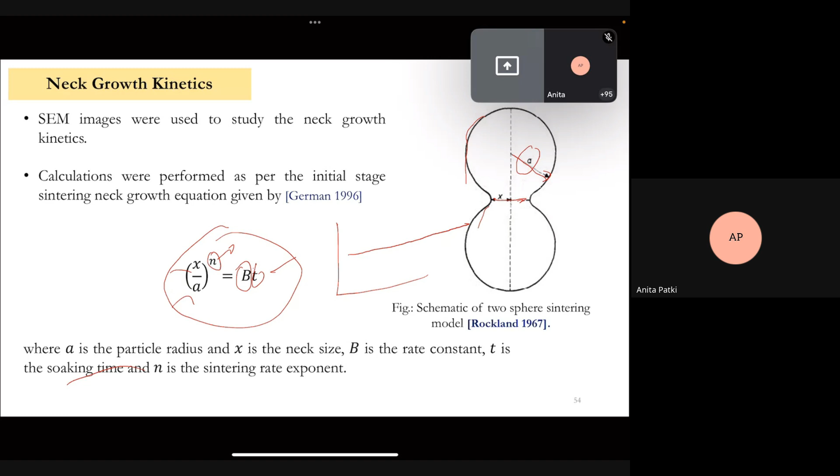You can write this equation for B in the form of B naught and exponential of minus Q by RT. This is the Arrhenius equation we use for heat transfer, where Q is the activation energy. It depends upon the particle size and what the particle material is. This is known for most materials, and you have temperature and the universal gas constant.

As I mentioned, when we are doing ultrasonic sintering, you are bombarding the particles, and we are generating temperature. To verify this as per this well-known model in sintering, we added a component delta T, which represents the increase in temperature.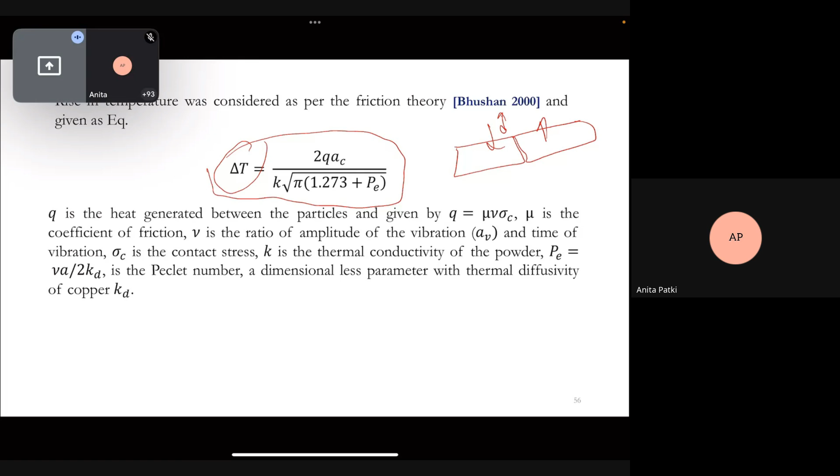This delta T we derived with an expression given by Bhushan et al. When you have two surfaces in a cyclic mode, you are rubbing them together, so you get an increase in temperature which depends upon the amplitude of vibration, how much vibration is happening, the time of vibration, and the thermal diffusivity related to the thermal conductivity, in this case of copper.

What is the particle size, and how much heat is generated? That heat generation depends on the coefficient of friction and the ratio of vibration amplitude. All these things can be calculated from experimental setup, because we have a horn where we know the amplitude of vibration, the time of vibration given to the particles, the thermal conductivity of our particles, and the shape of the particles—all things are known.

So we added this component here, and we try to verify our X by A relation. For the verification...

We did SEM analysis on very large particles, of 100 microns. We took 100 micron particles and did experiments to calculate this relation of X and A, for different soaking times—60 second, 180 second, 300 second, 900 second—and at different temperatures, capital T.

So we found the X by A relation with time T. Our mathematical relation was X by A versus T, so we put it in a log-log form and plotted it to get the constants.

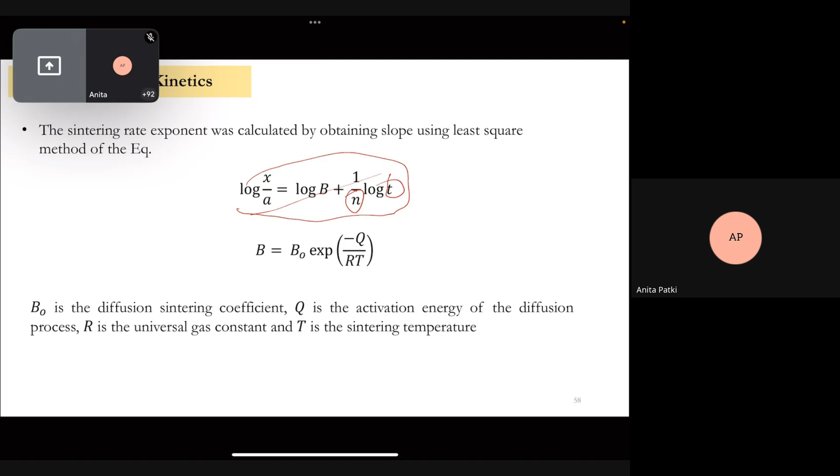The n component, as per the literature, gives us the mechanisms—what type of mechanism is happening. If you find the n value, you can relate it with literature to say whether evaporation and condensation is happening, plastic flow is happening, or grain boundary diffusion is happening. That can be related to understand the physics.

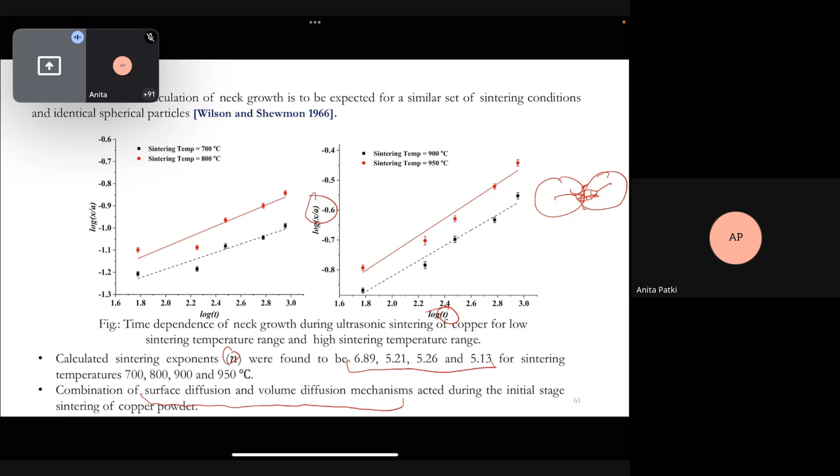We found n values around 5 to 6, indicating a combination of surface diffusion and volume diffusion. Generally in sintering, surface diffusion happens predominantly, but due to better dislocation, there could be a chance of better volume diffusion. We are not going into the science of these diffusion mechanisms, but due to dislocation there is a better chance of volume diffusion, which we verified with our experimental results.

We also did a number of experiments to see whether it gives us a uniform distribution, and whether we are getting the same universal distribution curve from the experiments as from our analytical calculations.

So for sintering, does this metallographic study affect this? Metallography will not affect it because I am not changing the copper structure. I think you're having some confusion here, let me go back to my slide.

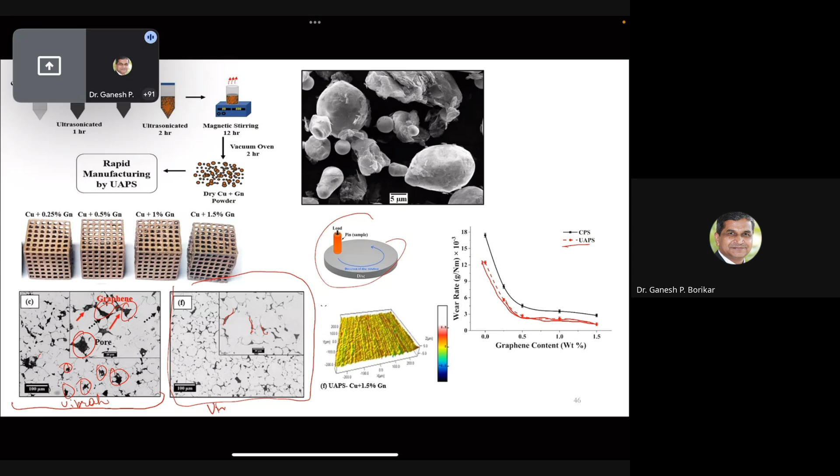When the pattern cavity is obtained, how is the lattice structure obtained in that pattern cavity? Because when the pattern is solid, there is no issue, but my curiosity is how the lattice structure is obtained with the help of that.

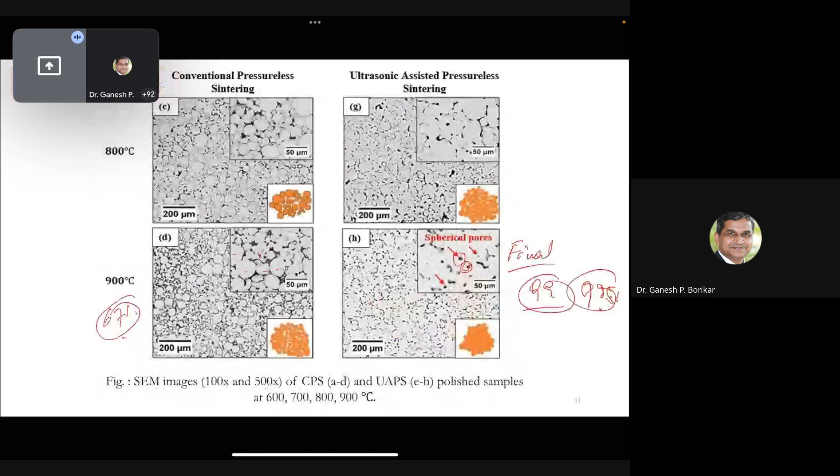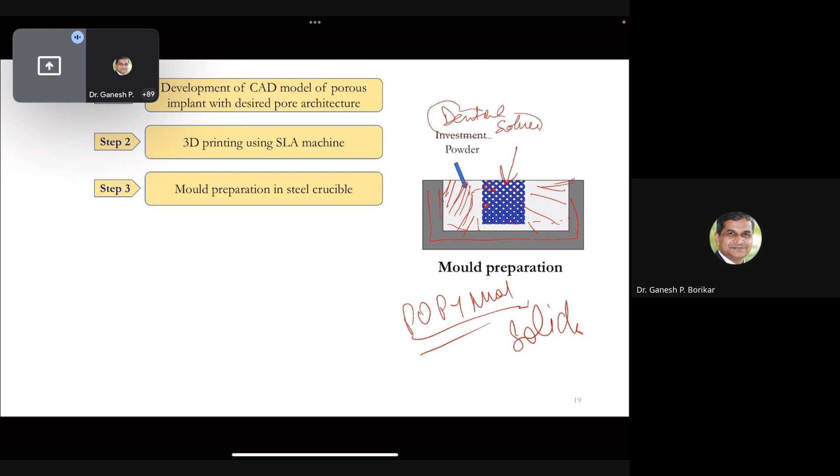Initially, when you are filling it, it's like POP - we are mixing the POP with water, and it gets solidified. Let's assume we have mixed POP with water and filled this whole crucible with POP water, and this liquid goes inside these pores and solidifies, even inside the pore. Then you burn this polymer inside the furnace at about 200 degrees Celsius, so you get this cavity which is of foam structure.

Now the cavity will have a foam structure, so you will put copper, and the copper particle will move like this.

Okay, it will move on the lattice structure, so it will look like this. Then you can sinter it. Got it, sir. Thank you.

Sir, what are the effects of vibrations or different frequencies in terms of strength of that composites, or how do you optimize those vibrational frequencies during the ultrasonic vibrations?

So it depends upon your setup. Like in our setup, we are having a transducer working at 20 kilohertz frequency.

Okay sir, suppose if I give 50 kilohertz or 15 kilohertz, then what are the effects on the strength or mechanical characterization of that composite? So we have not tested for 50 kilohertz, we have tested for 20 kilohertz.

So what will happen, I can tell you. When you have a higher frequency, you'll have better bombarding of the particles, it will bombard with each other at a faster rate. So you will have more chance of dislocations, more chance of local heating. It could give you better density.

So there are optimization techniques to set the good vibration frequency to get good strength, but these are very costly products. Getting a transducer costs about 1.5 lakh. So instead of making a whole transducer, we can optimize other parameters which are cheap and easy to do. Oh okay sir, okay thank you.

Dr. Pritesh Bansod, please ask your question. Sir, how are these lattice structures made in the solid model? How do we prepare the solid model of this lattice structure? Which software can we use for it?

I have made it in SolidWorks. But these days, because these are very difficult to design manually, now this nTopology software is there. Even the academic license for one year is free. You can use nTopology, so we can easily make structures of any type of graded structure or other structures.

Even if you go to GitHub, you will get simple code, MATLAB code or Python code for lattice structures, where people have given options to choose the width, thickness, and shape. Like you need a BCC or a simple cubic, whatever type of shape is required. You can just fill it in, compute it, and you will get the shape, then you can save it as an STL file.